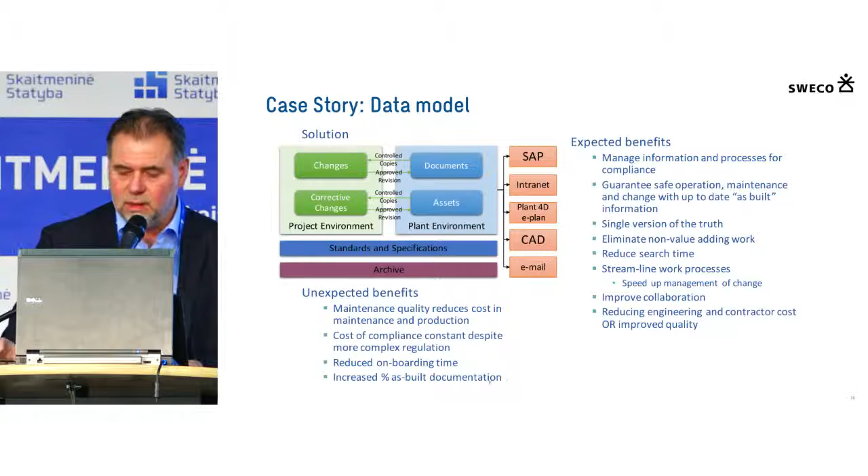And it's also important, surely also from a compliance issue, to have an archive of the history of all your assets. And then of course it's also important to have some connectors to ERP, for instance for a maintenance system, or to some 3D design models, or for email, to have the workflows running through your asset information model.

And then the third thing, it's been said already, it's not only about information and data structuring. It is these four elements which will make out the success of an asset information management system. Of course it's the information that you have to structure, but it's also about people.

You have to have the buy-in of people, you have to train them. They are the ones that have to give the input, they are the ones who retrieve the information for the system. So they're very important. Of course, next are the procedures in your organization, for instance handover management from engineering or construction to operations. Your change management is also very important.

And at last, maybe the IT systems, where you have IT systems with some distributed data.

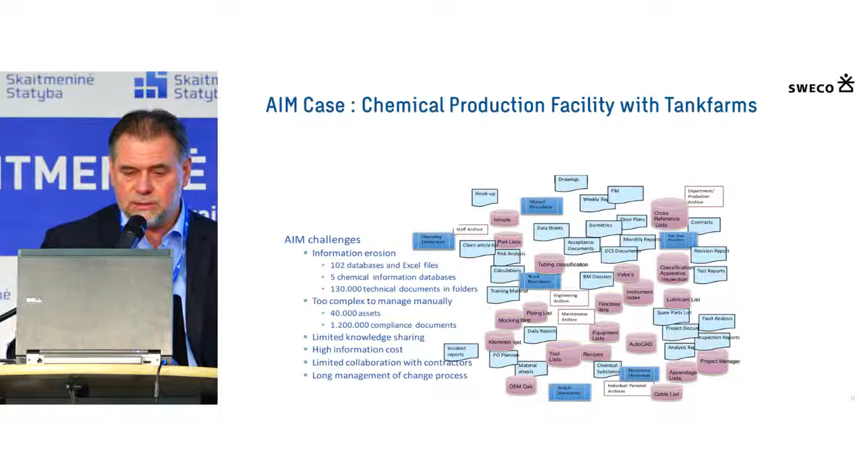So how to manage this? How to manage, also as an asset manager, the intensity of change, for instance. So you have your concurrent engineering, and we see there are projects always running in the installation which will modify your assets. You have your capital projects, where you have a mass of information and documents which ought to be handed over to operations, and then you have to manage them.

Of course, some regulations, which are important, which are very dynamic - every month you get a new rule. The dysfunctional handovers and the information silos from each department, as you know, I expect.

This comes to information incidents, but this is I think a really important one, because the lack of data generates a huge cost. This is from ARC, which is an American company, which has done a survey over the last 5 years, stating that a company with a yearly revenue of 15 million sales will encounter a 750,000 euro loss because of lack of data.

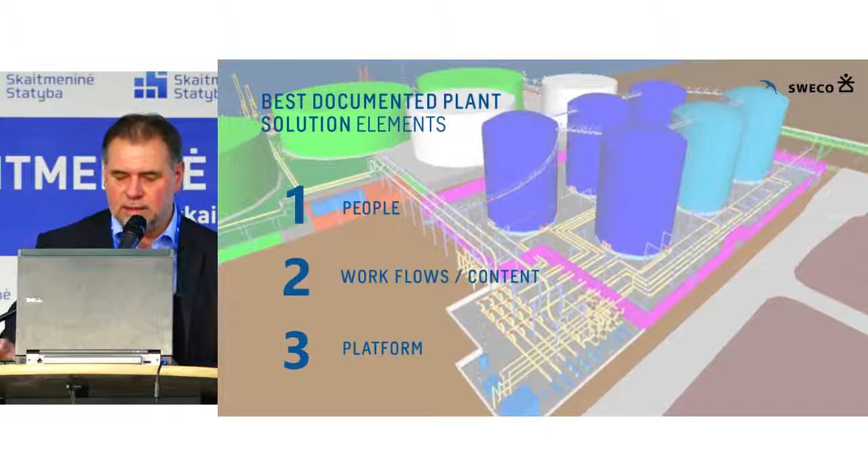So this gives the notion of the best documented plant in three elements: people, workflows, content, and the platform. From people, we said it's not only about information and structuring, it's also about the people, because the people are giving the input, the people are asking the questions - from an engineering viewpoint and maintenance, why did it fail, for instance?

What is tested at a given moment? From an operational viewpoint, how do I get it fixed? Where do I find the parts? But also for a supplier, for instance, and also for the regulator. From a content point of view, what is the function of this equipment? What are the design data?

Also, some procedures are on the equipment to install, operate, and maintain. These are data which are very dynamic, so they are bound to have some change management. The other data can be commercial, status, or history - more event driven, and there you have to have an historical record of it.

Then about the workflows - it's not from day one that you have very efficient workflows. It takes a path forward from, let's say, data migration to have some procedures upon the data, to have processes in, to have workflows, and see that you maintain that.

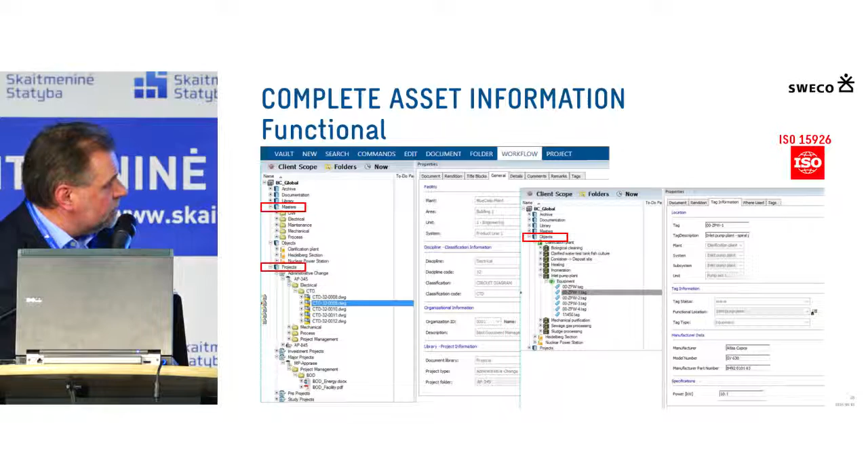You retrieve to the object, which is the pump, to, let's say, the data of it, which is the data, which is according to ISO 15926.

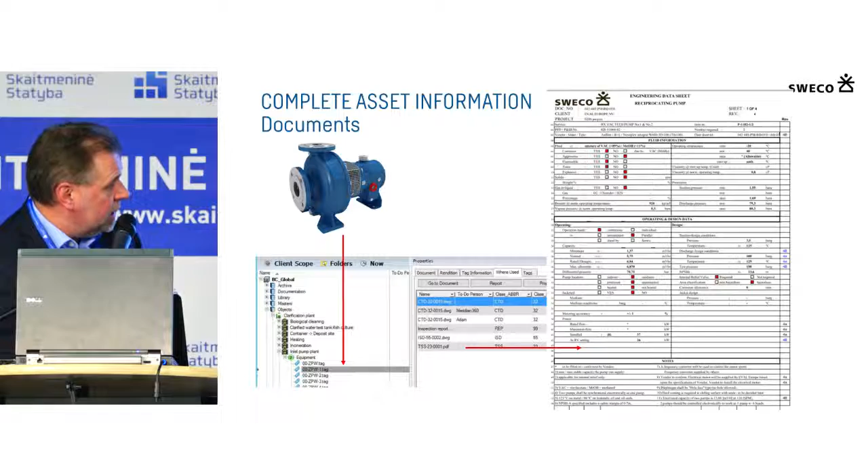From a document point of view, you have this same pump, within you retrieve, let's say, the data sheet, which is maybe in another system. Another thing is what are the required SEMA documents, in the sense that you have here your repository, and you have here the status of these documents in your plant.

Very much important, for instance, for the handover from a project to operations. And you have here a full statement or a full SEMA status of what documents, in what stage they are, and then you can focus on the actions to retrieve them.

So for instance, in this, the general arrangement drawing is issued and the spare part list, so they're okay. The installation manual is still in review. We requested the vendor for the maintenance manual, but still the wiring diagram is missing. So we can go after that and focus on it, so we have a good handover management.

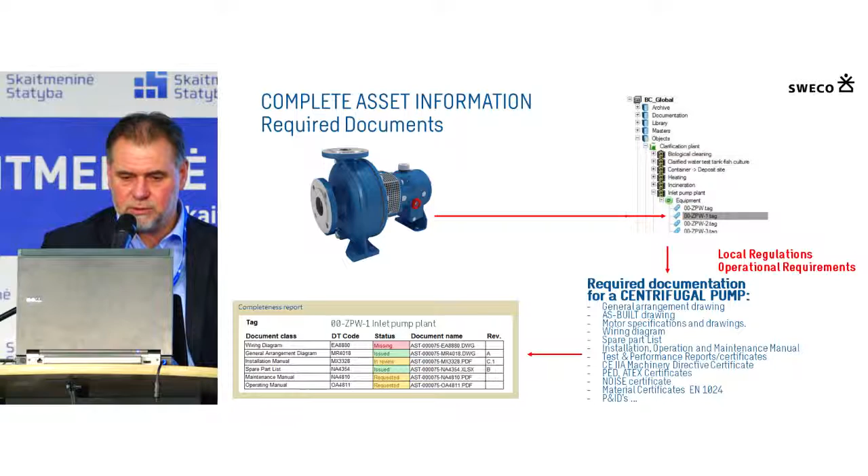But asset information management, the strength of it is if you can combine this with the visual aspect, it gives you a far more added value, because people seem to have more some recognition with a visual aspect than when it's on a list or just data. So the challenge is here to use visualization, 3D visualization, to support AIM, meaning that this is the entry to your database.

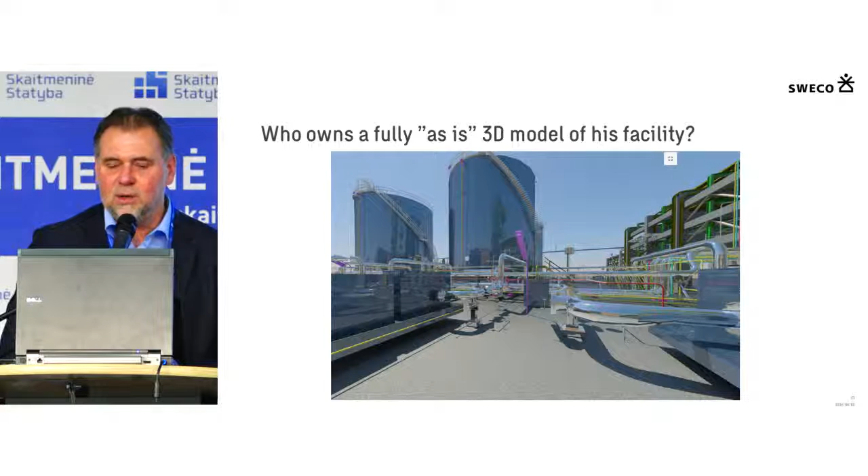So in an ideal world, the as-is information should be a 3D design model. But as we said, at least in industry, this is an ideal world - this won't come now, and this won't come in the future. So how to do this then? How to manage this? Then you can go to some sort of hybrid environment where you have

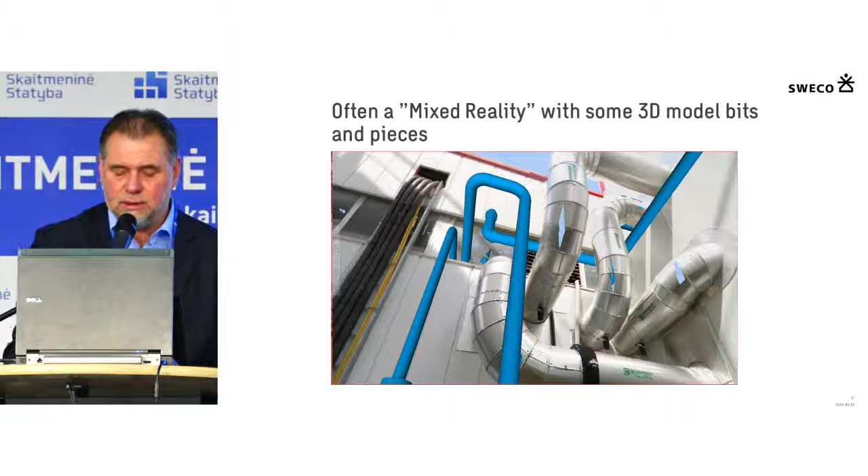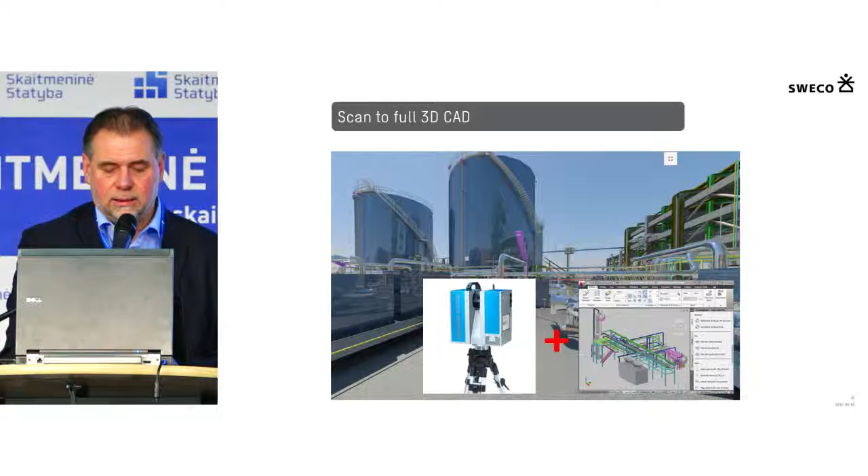realistic 3D photos combined with 3D design models, combined with laser scan point cloud models. So this is the way to go. These are all techniques which are now already in use - for instance, a scan to full 3D laser scanning to point cloud, photogrammetry, or 360 pictures. So a scan to full CAD that's known, to a point cloud is also known, I think.

Or you can go to 360 panorama photos. All of them, of course, have their benefits but also their costs. If you look at a 3D model, of course, it's from a data set and from geometrical accuracy, this is the best. But the effort to maintain a 3D model is very huge, so it's likely that it won't happen, at least not to the full.

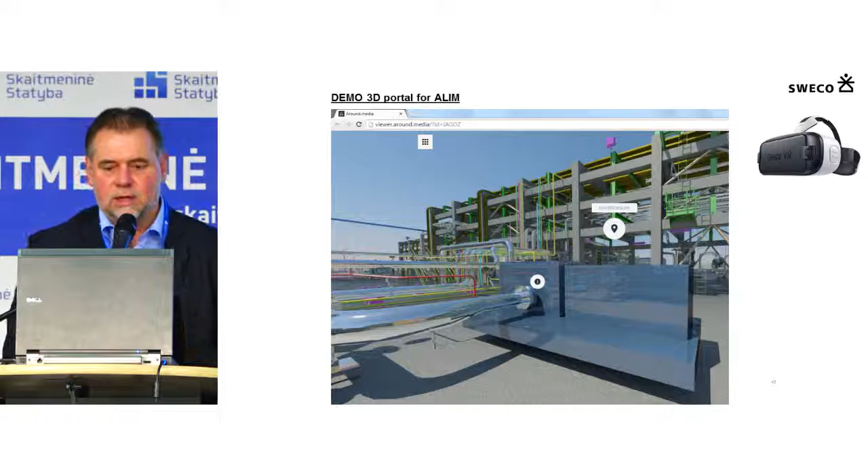This one is a valve where you have some of the spare parts lists of the valve. It can be combined with a work order, etc. So it's a hybrid environment of what's available: 3D design model, point cloud model, photogrammetry, or a 3D photo. You combine it, but let it be the link to the asset information model.

Okay, to conclude, back to this. This is a real case that we developed, where we see the benefits which are expected or maybe obvious, such as compliance, reduced search time, and of course improved collaboration. But the unexpected benefit was that maintenance quality was also very much improved. The cost of compliance too, because every time you get new rules you have to generate reports, which takes much effort, so this is done in a very efficient way. And it also, I don't know what happened, but it reduced onboarding time, meaning the introduction of new people in the plant is going much faster and smoother than in the past.

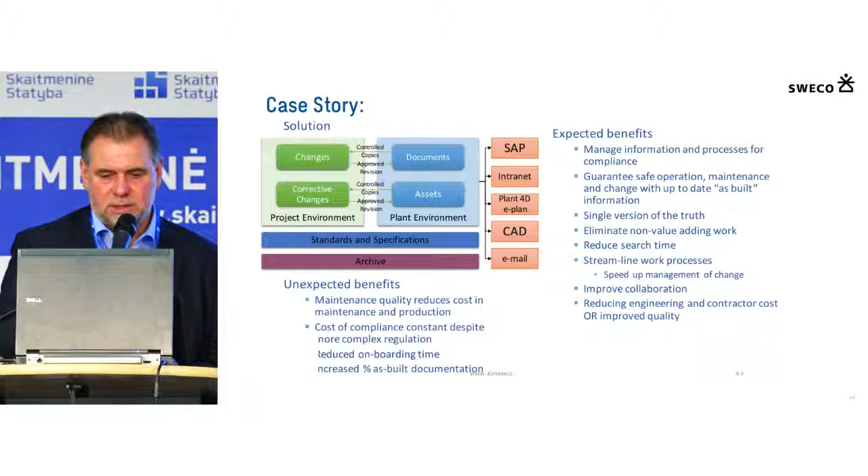To conclude, asset information management, somewhat a roadmap. I always say a good asset information management is in the eye of the beholder. What I mean is, it's very different if you're in a refinery business or you're operating a nuclear power plant. In a nuclear power plant, you're very much keen on compliance. In a refinery, you seek the link with maintenance, with inspection programs. Every plant or project or implementation is unique, but there are many best practices you can rely on: the four elements, information, people, procedures, systems.

And of course it has to do with information management. So from a methodology, it's very similar to an IT project. I would say think strategic about where you want to go, but start small. Get some early successes, mainly on cost savings, because this can prove to your board of directors that you have success. And as I already said, use all visual models in a hybrid environment, because this is the most pragmatic way. Okay, thank you. I want to conclude here.